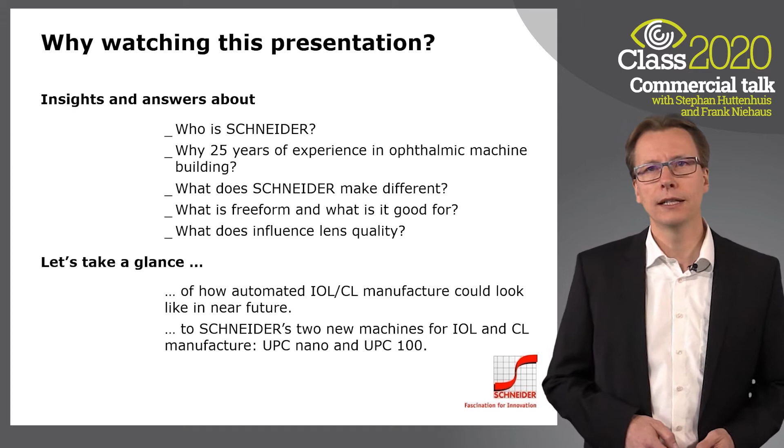The following presentation will give you insights about who's Schneider, why we have 25 years of experience with ophthalmic machine building, what makes Schneider different, what is freeform and what is it good for, as well as what influences lens quality. We will look at how automated IOL and contact lens manufacture could look in the near future, and take a look at Schneider's two brand new machines for IOL and contact lens manufacture, the UPC 100 and the UPC Nano.

This is the UPC Nano. It is a very compact machine with an extremely low investment price. It features an onboard fast tool system that allows for non-spheric machining, like toric or freeform, for a price less than most spherical machines. Plus, the machine is ready for automation. A more deep investigation of this machine is part of the following presentation.

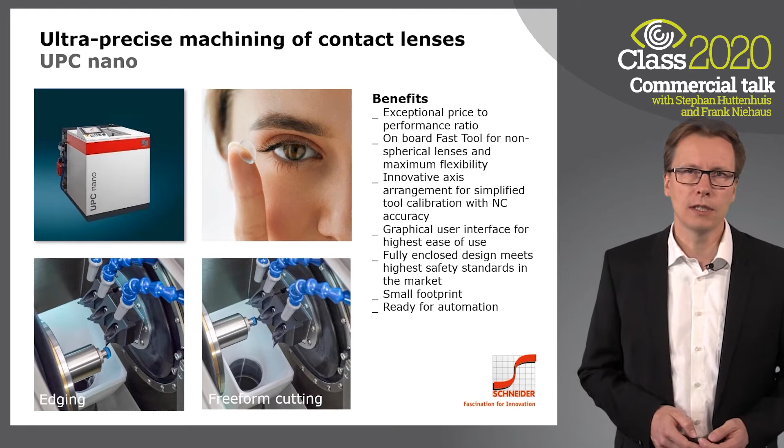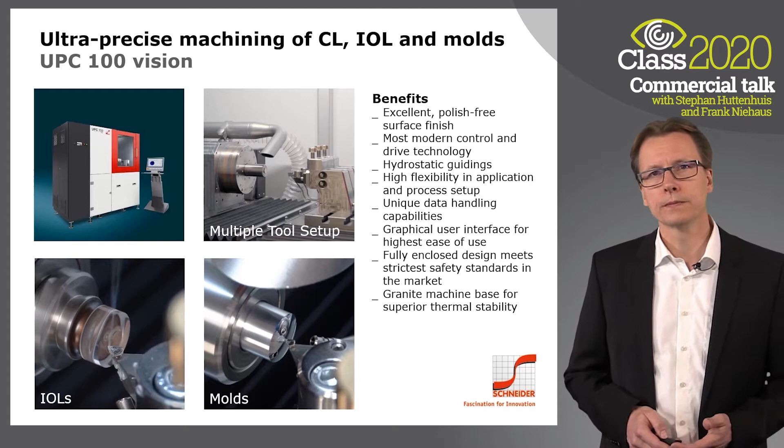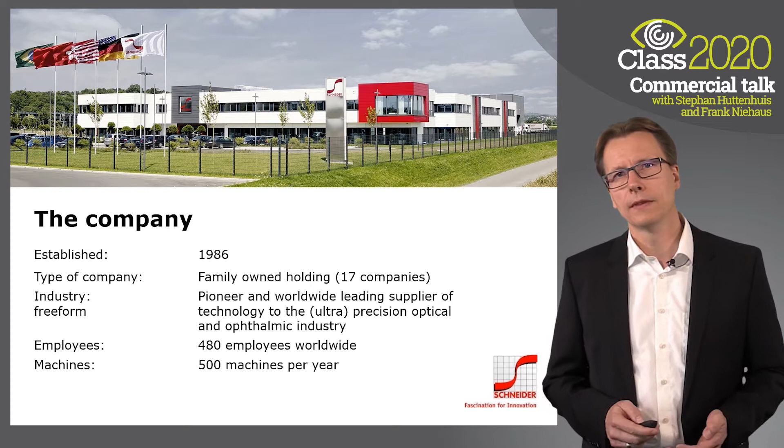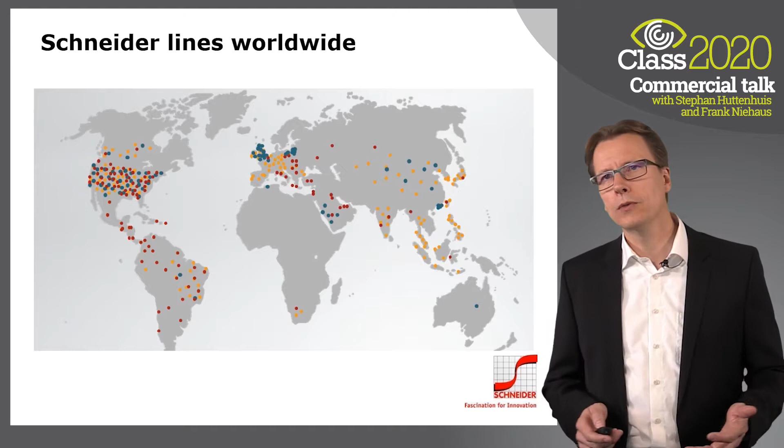So let's get started. We are a quite young company, founded in 1986, and became the pioneer and worldwide supplier of freeform technology. We have around 480 employees globally, and 10% of those are apprentices. We are building around 500 machines per year. We are a global company. Our customers are distributed throughout the whole world. Our export ratio is far more than 90%.

As a consequence, our service points are very international too, allowing us to provide local service in mother tongue in many cases. Our products can be found in ophthalmics, which is our biggest division, precision optics, where the company started, and in ultra-precision optics.

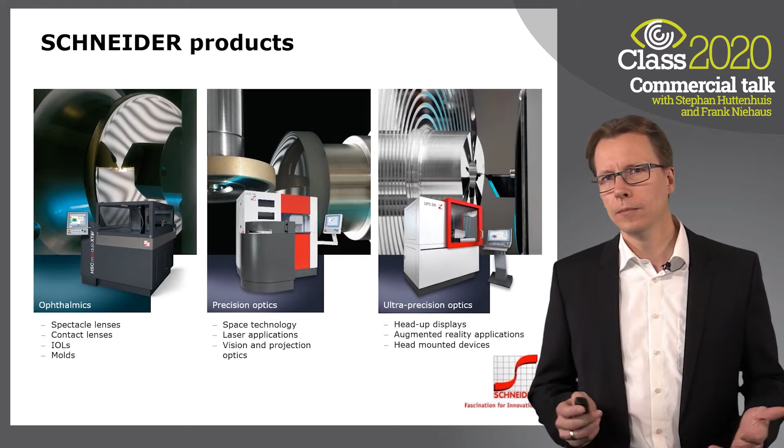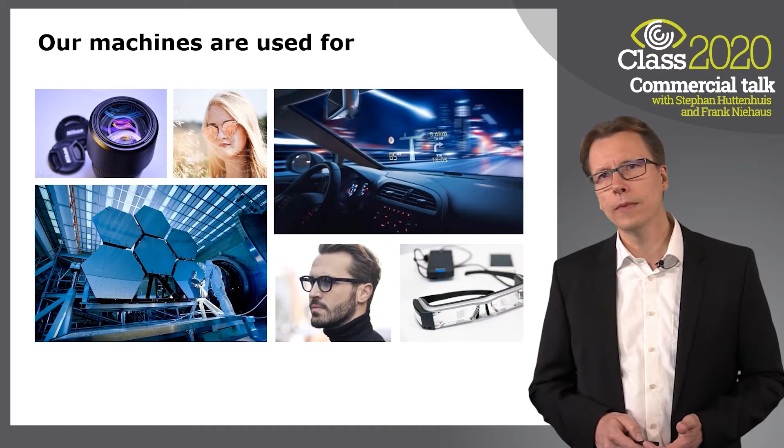Ultra-precision machines are considered to be the most accurate chip-removing machines possible. Higher accuracies cannot be gained mechanically anymore, but would require techniques like electron beam or lithography. Our machines are used for a vast variety of applications, like camera lenses and space telescopes, sun and prescription lenses for spectacles, or head-mounted devices in augmented and virtual reality applications.

Our company slogan is Fascination for Innovation. This means we are always keen on creating solutions that can do more. It became a passion to push limits which were considered to be unchangeable. This dedication allowed us to rewrite the story of lens manufacture and spectacle lenses. And we believe this can be done for contact lens and IOL too.

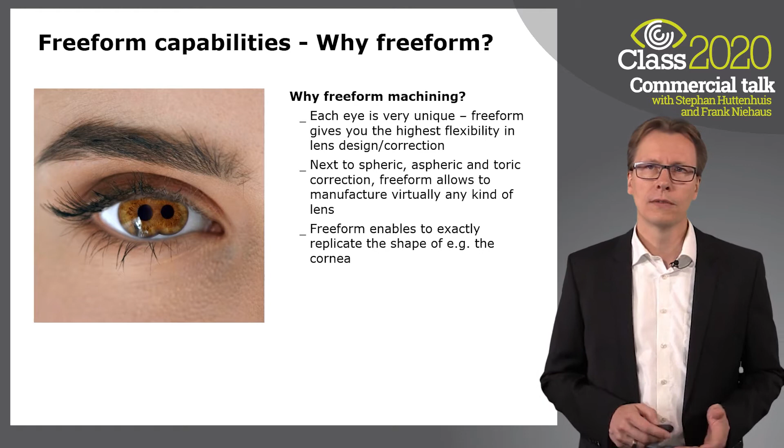So why freeform? Each eye is very unique. Freeform gives you the highest flexibility in lens design and correction. Freeform machinery can do spheric, aspheric and toric lenses, but is not limited to those geometries. Freeform allows you to exactly replicate the shape of the cornea, for instance as a starting point for designing best wearing comfort and tear film propagation, or to correct additional high-order aberrations like astigmatism, coma, trefoil, etc. But the more demanding the lens, the higher the demands on the machine and machine dynamics.

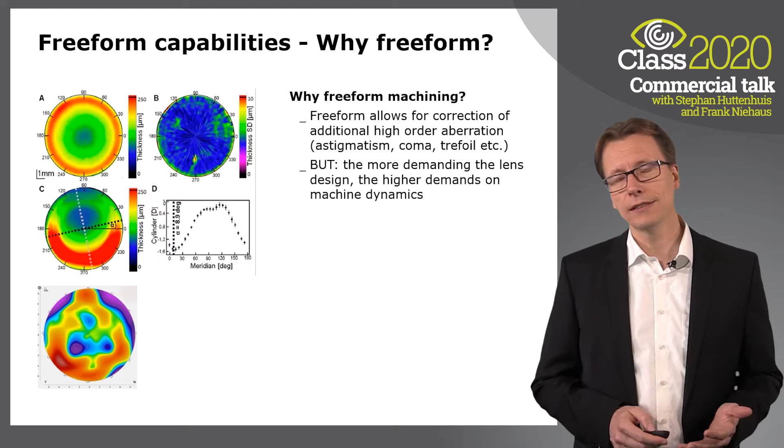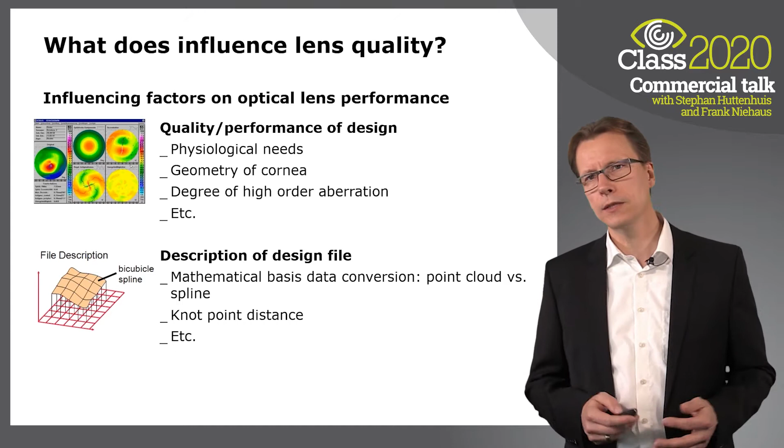A third route applies to the transition from design information to the according machine axis movement. What is the related acceleration and slope of the axis? How can I avoid a decrease of data quality within the multiple conversions from designer to controller, to NC code generator, to the drive, and finally to the axis itself?

And a fourth group is the process design itself. What parameters should be used, and what is the best compromise between throughput and quality? So there are a lot of influencing parameters that need to be taken into consideration to make sure you get the best possible lens quality.

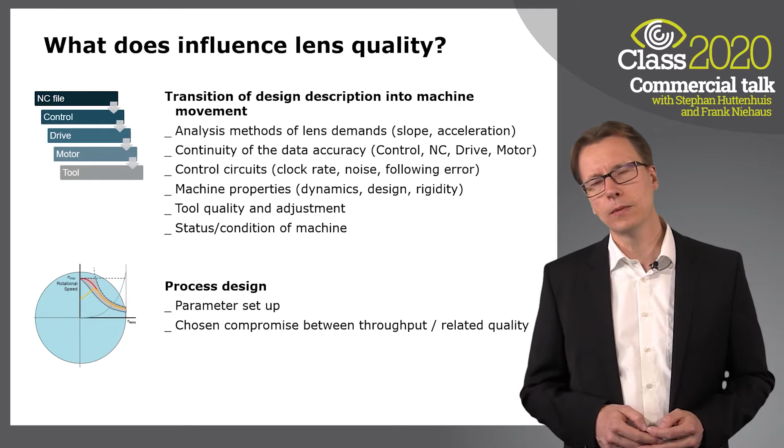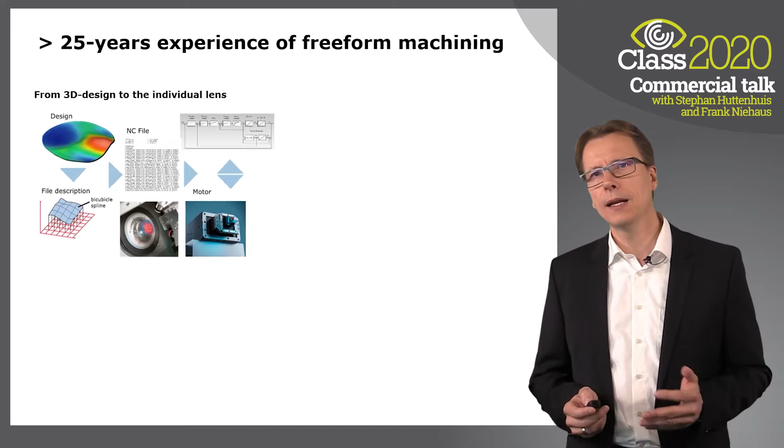Schneider has been paying attention to all of these aspects for more than 25 years. We developed our own software and mathematical architecture to extract all relevant data from the design file to create an automated NC code engine. And we designed according regulation loops, and even the dynamic motors are designed and produced by Schneider itself. We take care that our regulation loops are fast enough and our motors quick enough that even the most complex freeform designs are met with highest precision.

We take care that our drive systems have lowest noise levels to avoid unnecessary surface roughness on the lens. All this is done with one goal in mind: to create the best possible lens quality.

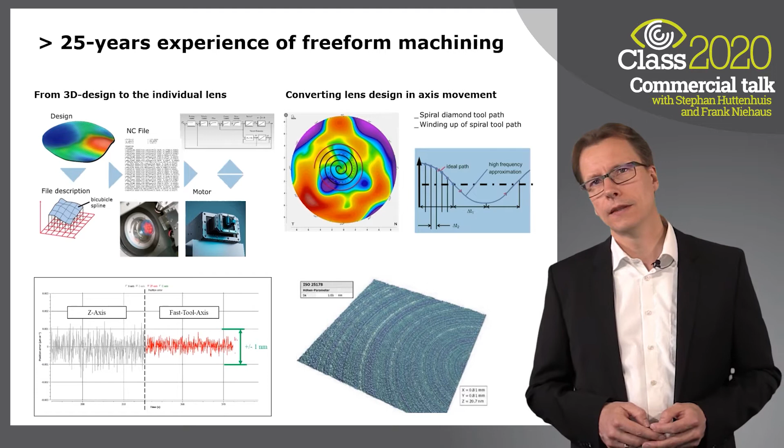Since the beginning of freeform, Schneider deals with mastering all quality influencing factors and made freeform machining the core competence of the company.

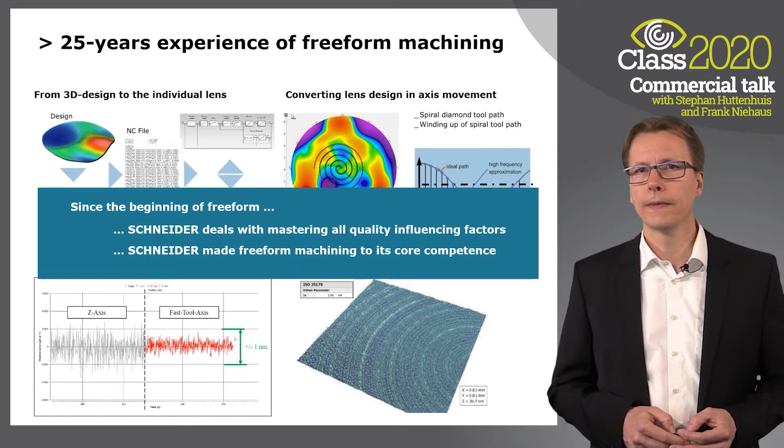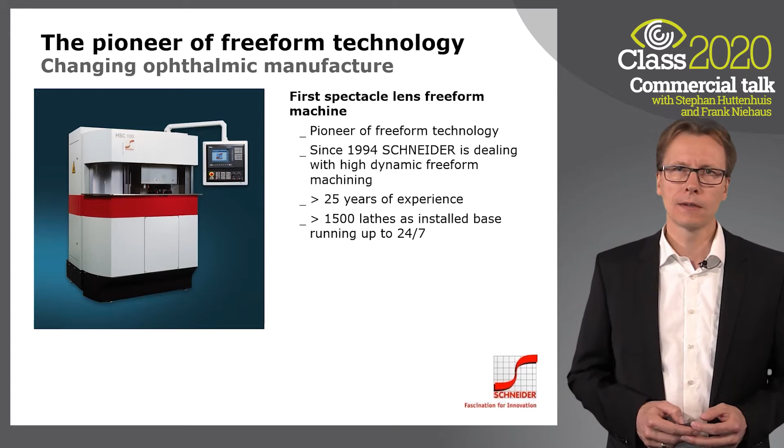Our journey as a pioneer of freeform machining started in 1994. Today we have an installed base of more than 1,500 lathes running 24/7 in most cases. Over time, we were able to offer dedicated solutions to all different aspects of the spectacle manufacturing chain.

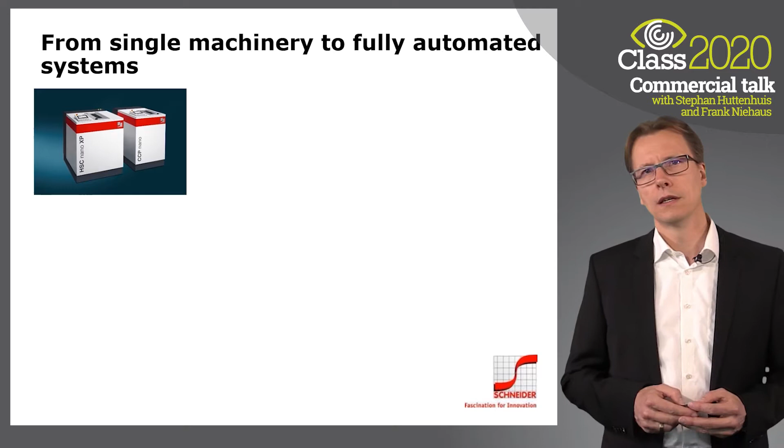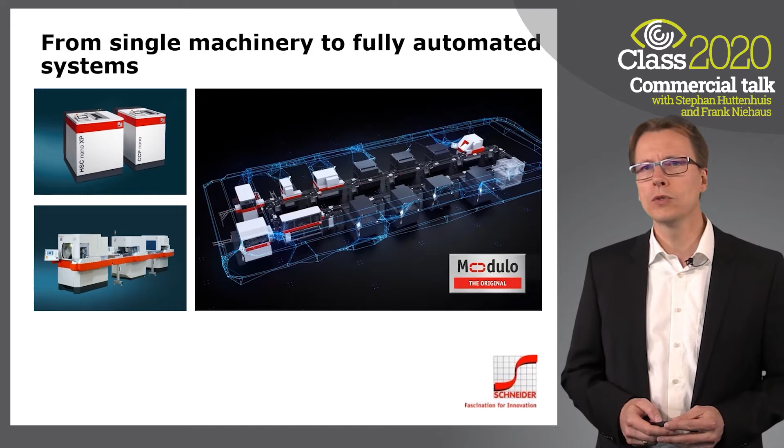Our path led us from single standalone production machines to machine lines to a fully automated self-balancing production system with integrated lens logistics. Today, we are a full solution provider in the ophthalmic business, including software.

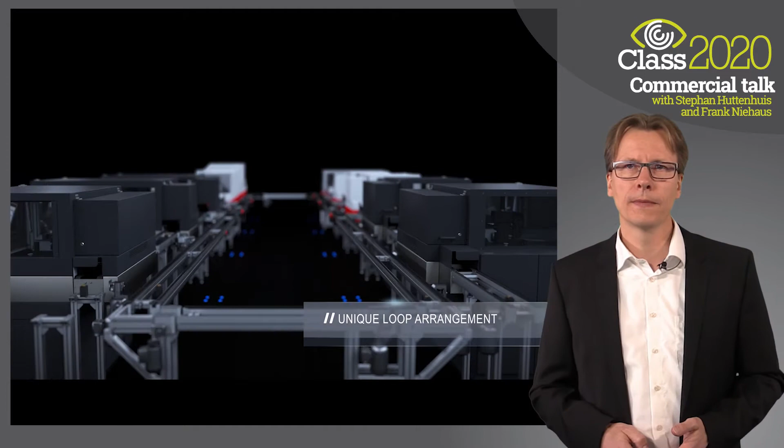What you can see in this video is the first industry-proven, fully automated spectacle lens production system. We call it Modulo. Modulo allows to integrate many different types of machinery into one lens logistics system.

Its basic philosophy is to organize the workflow completely by itself. The system understands which lens can be machined at which place and takes care that all machines are running as much as possible. This allows for the best throughput and the best utilization of your investment.

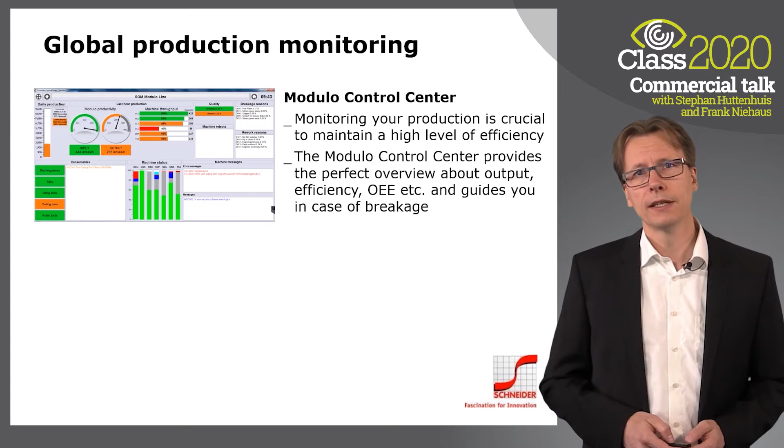Highly efficient production needs good monitoring abilities. The Modulo Control Center tells you for each machine the according production status. Does it run or not run? How much lenses were made? It shows the overall equipment efficiency and guides you in case of a breakage.

The following video shows you the whole production system is monitored and controlled by the Modulo Control Center. The virtual lab overview represents the layout of your lab and shows you critical information at a glance.

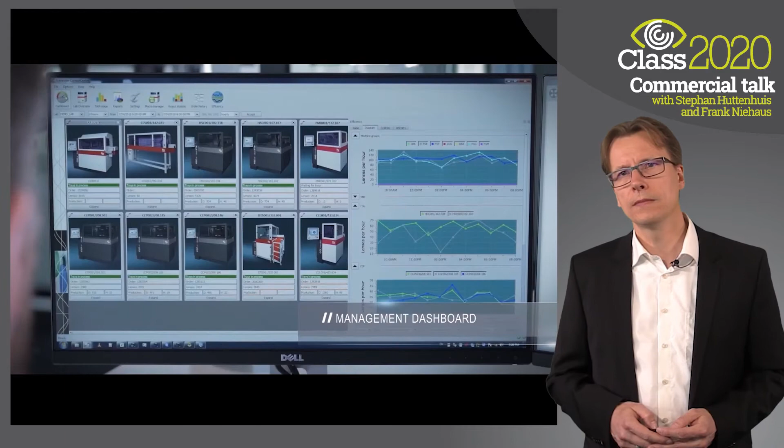Modulo allows for middle and high volume production, but still gives you all the flexibility that is needed to keep each lens unique and different. This system is used in spectacle lens manufacture since 2013. In the meantime, over 100 million lenses were already made using the system.

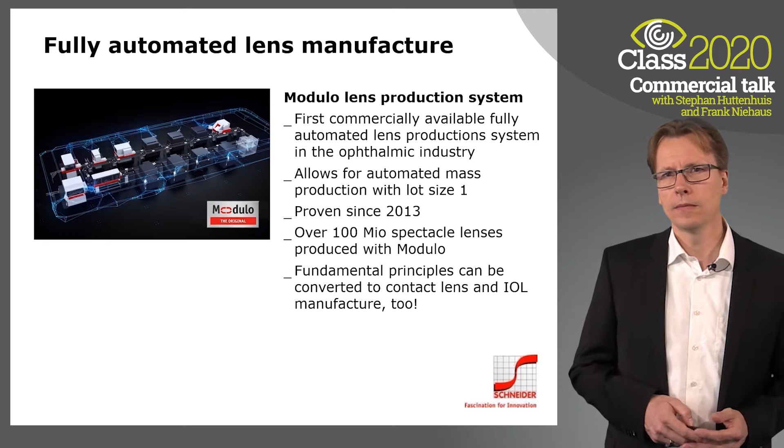We believe that fundamental principles can be converted to contact lens and IOL manufacture too. It may not look the same, but it will be able to do the same. Our journey from 1994 until today considerably changed the way of automated lens manufacture and forced us to continuously reinvent ourselves by driving innovation. It paved our way towards becoming a full solution provider.

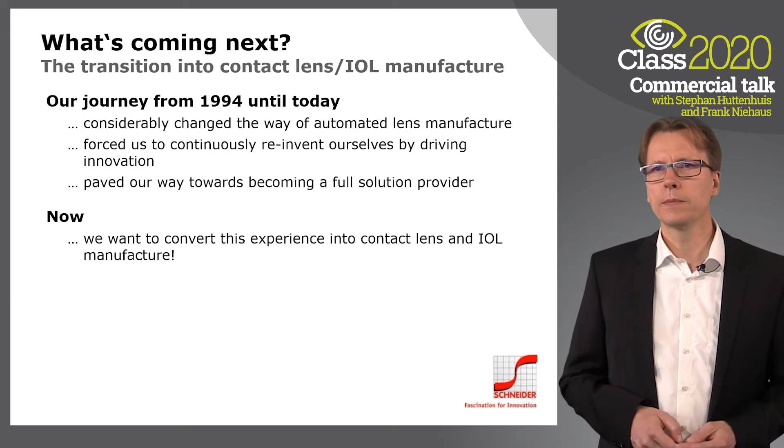And now, we want to convert this experience into contact lens and IOL manufacture. Our first step is the introduction of these two brand new machines, UPC Nano and UPC 100 Vision, that will be presented in more depth by my colleague.

The UPC Nano is a very compact machine for the contact lens and IOL market, and the focus is on a very good price to performance ratio.

Already in the basic configuration, the machine comes with an onboard fast tool that is able to carry up to 3 tools. This allows to machine a wide range of optics, spherics, torics, sclerals, and even freeform lenses.

Usability has always an important role. Hence, the innovative axis arrangement supports the operator for an easy and quick tool calibration without manual adjustments using only NC axis. The graphical user interface in combination with a touchscreen is also very convenient to use.

With the machine you can get an optional laser marking unit, and the machine is also ready for automation. For safety, the whole machine is fully enclosed, fulfilling highest safety standards in the market. All these features are integrated in this compact machine, having a footprint of only about 1 square meter.

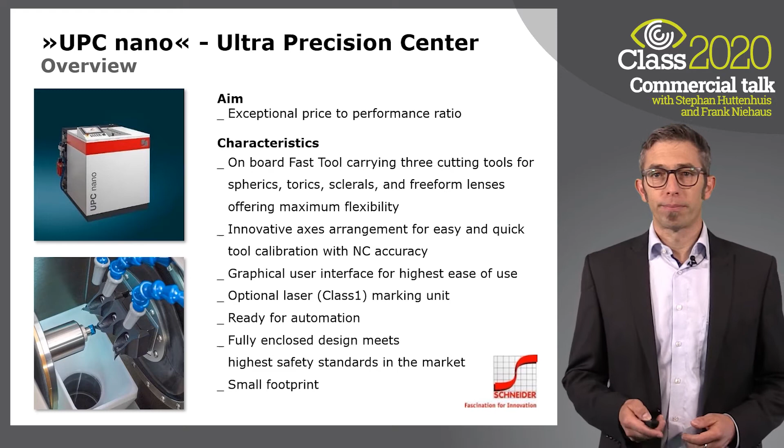The distance between the cutting tools allow for a maximum workpiece diameter of 25 mm. With this special tool setup, we really turn the whole process upside down.

The nozzles, which can be activated individually by the controller, blow from the top, and the chips and swarf is leaving the working chamber through the base of the machine by an exhaust system. The chamber is not only prepared for spray misting, but also flood cooling is possible, which can have a positive effect for certain processes.

The air-bearing spindle comes with an automatic collet for a diameter of 12.7 mm and has a maximum speed of 10,000 RPM. All in all, the compact machine base in combination with an air spring isolation unit allows for sub-micron accuracies in the lens manufacturing. Let's see how the machine is operating.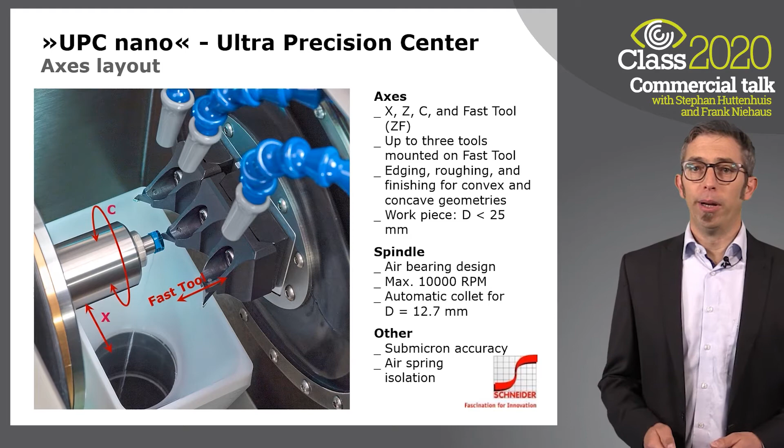Here we see a video about the machine process. It's about the cutting of the backside of a lens. It starts with the machining of the outside diameter.

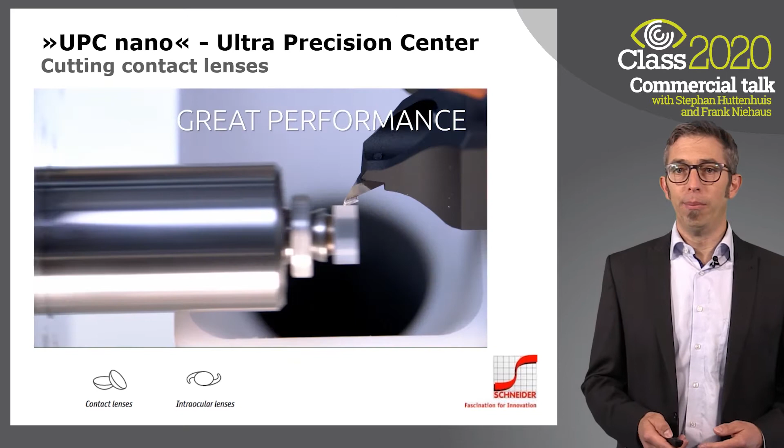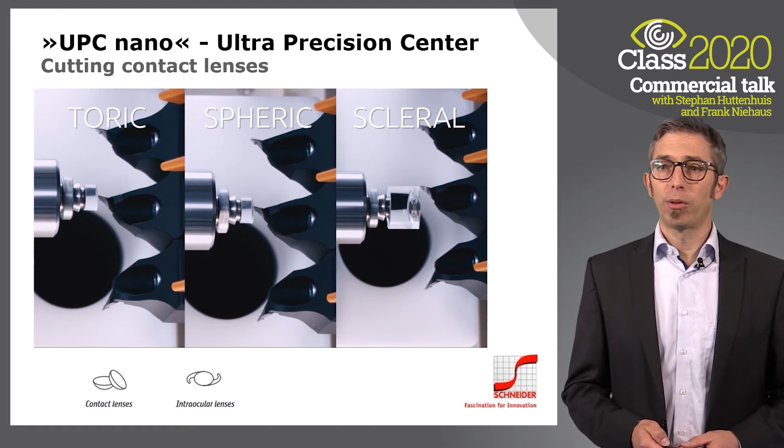After that, the lens is further processed by the roughing tool in the middle. As mentioned earlier, the geometry is not only limited to spherics, but already with the base configuration of the machine, torics and even freeform scleral lenses can be machined very efficiently. Finally, the finishing steps take place with the third tool.

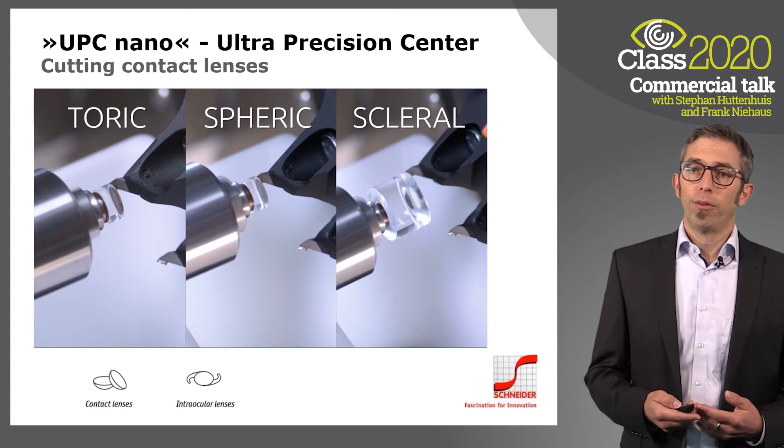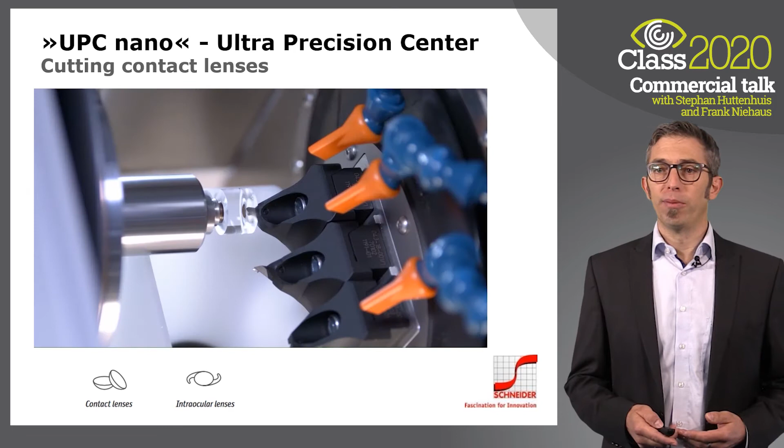The detailed view onto the scleral lens cutting shows very nicely the dynamic motion of the tool in the millimeter range. The motion control and toolpath calculation are based on algorithms that we developed for the freeform machining of spectacle lenses, ensuring high form accuracies, as Stephan described earlier.

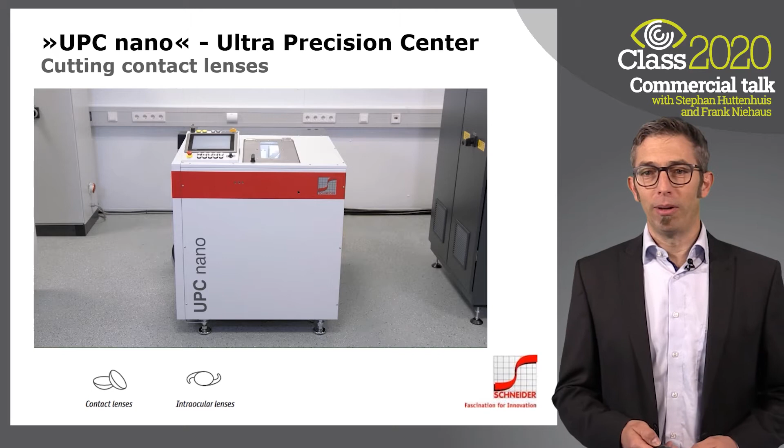Okay, lens finished. Let's have a look how the machine is operated. The machine controller is based on an industry PC with high availability and robustness. We use the same controller type in our ophthalmic machineries that are running all around the world, very often 24/7. The operating system on the PC is Windows 10 in the 64-bit version.

Also, the CNC is running in 64-bit mode, allowing for 10 picometers programming resolution. The modern Windows enables also the easy connection to your local area network. The interface for the operator is a modern touch display.

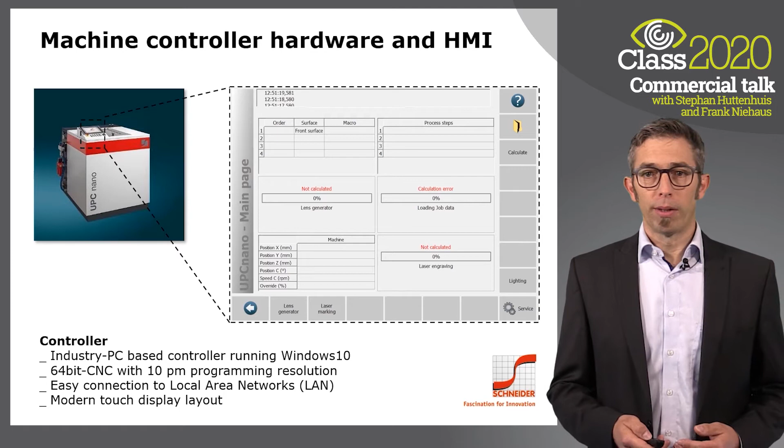The picture shows the main screen that allows for loading lens data files and the calculation of the toolpath. Then the cutting process can be started by hardware buttons.

Different data formats can be loaded to and processed by the HMI on the machine. We can work with meridians or point clouds. There's also an interface for the focal point software package. Since we do all the software developments in-house, we are also open to integrate other formats and interfaces. Just let us know what you need.

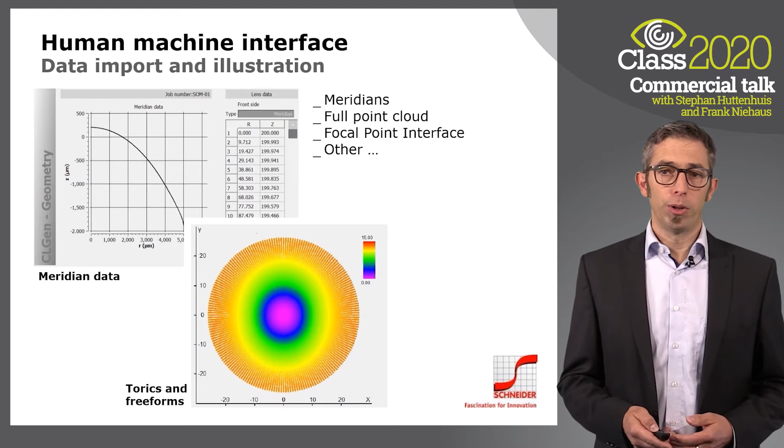Earlier I was already referring to the tool calibration routine. What is meant by that? Due to the innovative axis arrangement, we are able to correct the tool height by refining the fast tool position. By that, the operator just has to type in the determined tool offset in height, and with the position of the NC axis, the machine does the adjustment by itself.

Besides the ease of use, this allows for a very rigid connection between the cutting tools and the dynamic moving fast tool slide, excluding any tiny adjustment flexures or mechanisms. And in the end, this increases surface finish of the cut lens.

Of course, you'll find all required tool information in the tool database as part of the HMI. There you can also correct the tool position in the other directions like X and Z.

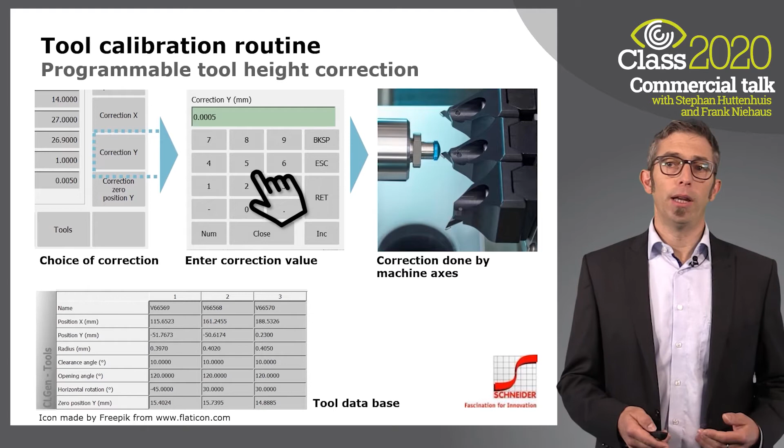Optionally, you can get with the machine a fully integrated laser unit, directly placed next to the cutting tools in the working chamber. This allows for safety class 1 operation without any further measures for protection. You can use this for different engraving tasks like ID codes, alignment marks or logos. The constant engraving quality is ensured by laser beam stabilization, overcoming well-known issues with CO2 laser units.

But the real specialty of this laser is that it's using a scanning mirror, as you can see in the sketch beside the picture. By the moving mirror, the laser focus is moving over the lens surface. This avoids time-consuming repositioning of the lens with the machine axis for every dot in the marking. Hence, even larger ID codes or special engravings are done within seconds.

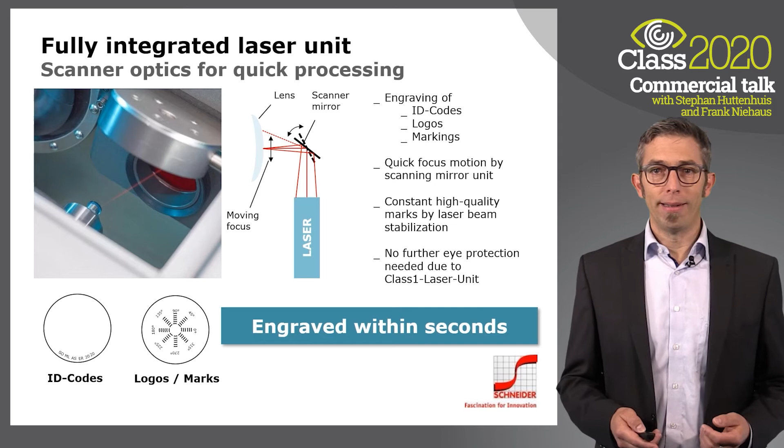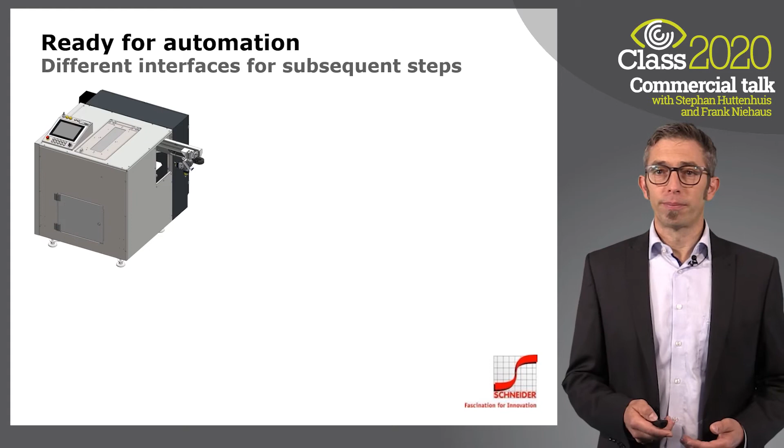The UPC Nano is prepared for automation and can cooperate with different principles. Therefore, a handling system is integrated into the machine for moving the lenses in and out, handing them over to the spindle. Outside the machine, there are various possibilities. A robot can be used to hand over the lenses to other machines for following process steps, or to combine the machine with an existing storage.

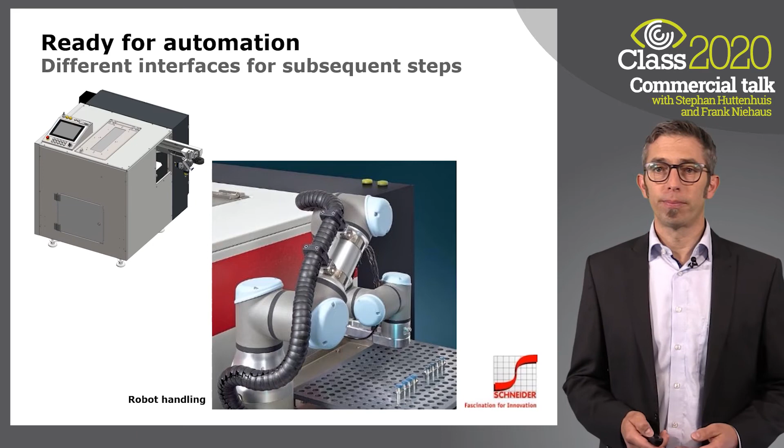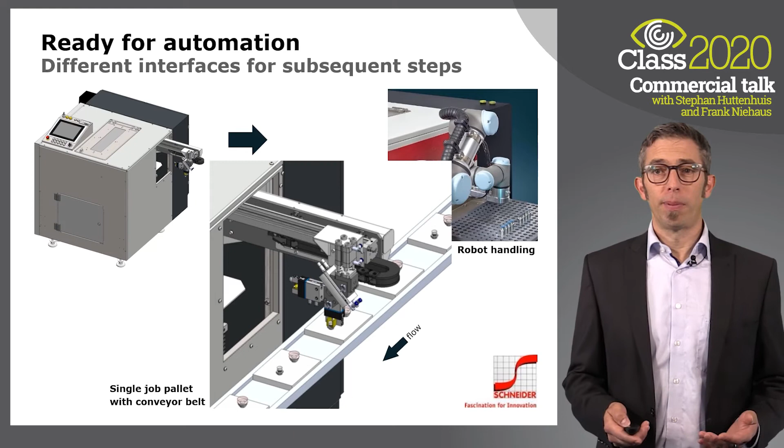Of course, the handling system can also cooperate with multiple job pallets, as can be seen in this illustration. If you want to set up a large system comparable with our modular system that we introduced in the ophthalmic market, or if you prefer a kind of one-piece flow, you can combine the machine by the handling system with a conveyor belt moving single job pallets through the production. By that, different solutions are possible to be most flexible for your needs.

Of course, adapted solutions can be discussed if you have specific needs regarding capacity or specific block piece geometries. Just talk to us. All in all, it is an investment in the future, enabling an increase in productivity of your lens manufacturing.

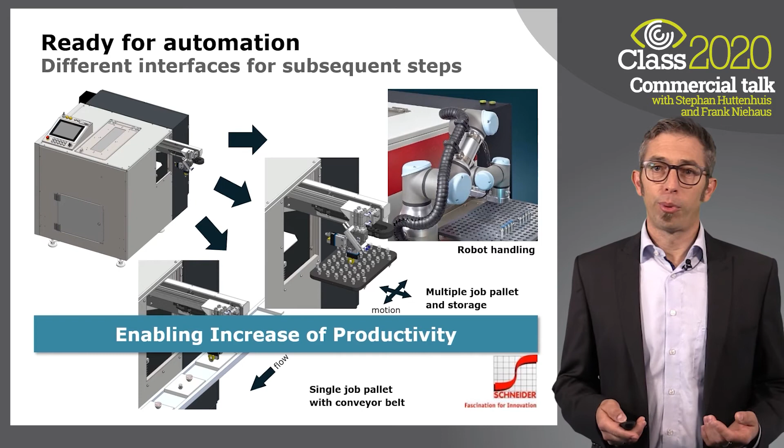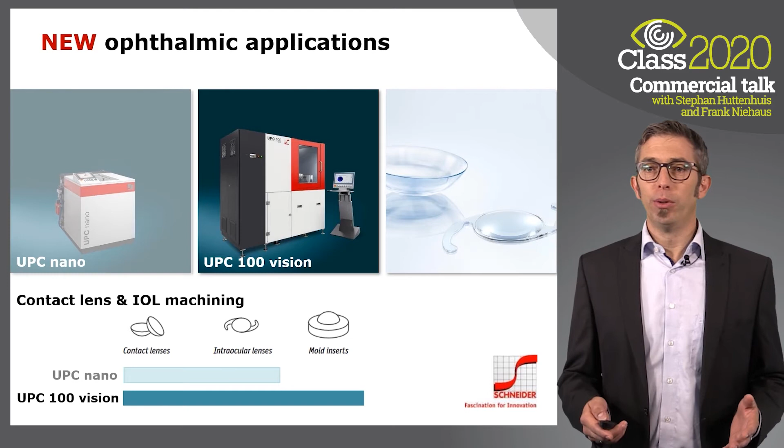So far, the introduction of the UPC Nano. Let's have now a closer look at the UPC 100 Vision. As you can see in the graphic below the pictures, the UPC 100 Vision is designed for a wider range of applications. Besides lenses, it can also be used to machine molds for the mass production of lenses.

This is possible since the UPC 100 Vision has been developed to achieve excellent polish-free surface finish combined with very high form accuracies. For this reason, we chose the most modern control and drive technologies, hydrostatic guidings for perfect damping and stiffness, and a granite machine base for thermal stability. Hence, the design follows principles of ultra-precision diamond turning technologies.

Although its high capabilities, the footprint of the machine is still small. The electrical cabinet, the hydrostatic pump, as well as the chiller are all integrated within the housing. As the lower picture shows, the machine offers high flexibility.

Due to a lot of space on the machine slides, you can arrange the tooling setups for your specific needs. The controller and the user-friendly graphical user interface come with unique data handling capabilities, in combination with the touchscreen panel. The machine has further a full enclosure to meet strict safety standards in the market.

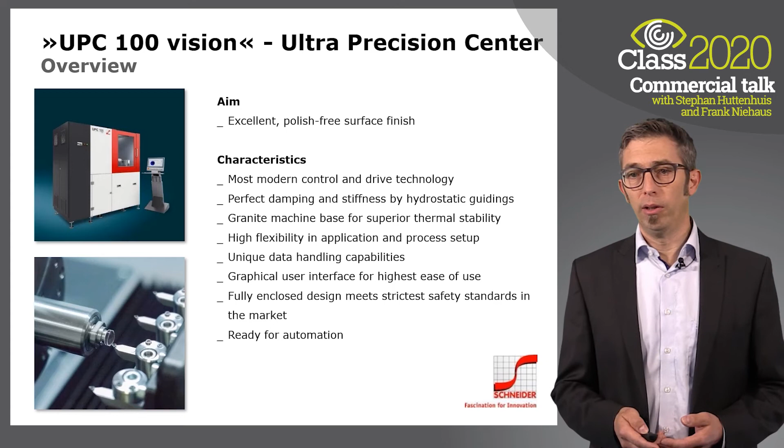Nevertheless, the housing as well as the controller are flexible for later integration of an automation system, similar to the solutions that I introduced for the UPC Nano earlier. Let's have a closer look at the working chamber. This picture shows the axis layout of the machine, which comes in the basic setup in a 3-axis configuration.

The fast tool for torics and freeforms is optional and will be mounted next to the tool holder on the X slide. The travel range of the X-axis is 250 mm and a T-slot plate allows for flexible tool arrangements. The Z-axis offers 100 mm travel and carries the air-bearing spindle, with an automatic clamping collet for the arbors.

This is a must for automation. In addition, each tool holder has its own programmable nozzle for air or spray misting during the cutting process. An exhaust system is available as well. Especially for IOL manufacturing, the machine can be adapted with a cryo-freezing unit. Here, the enclosure enables noise reduction and reduces contamination of the lab by chips and swarf.

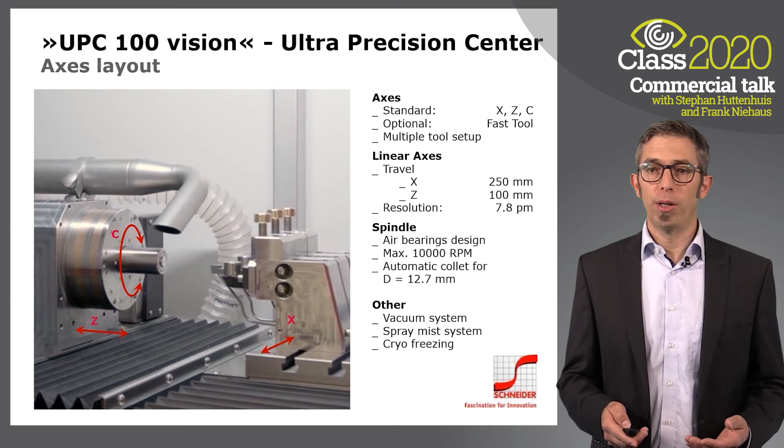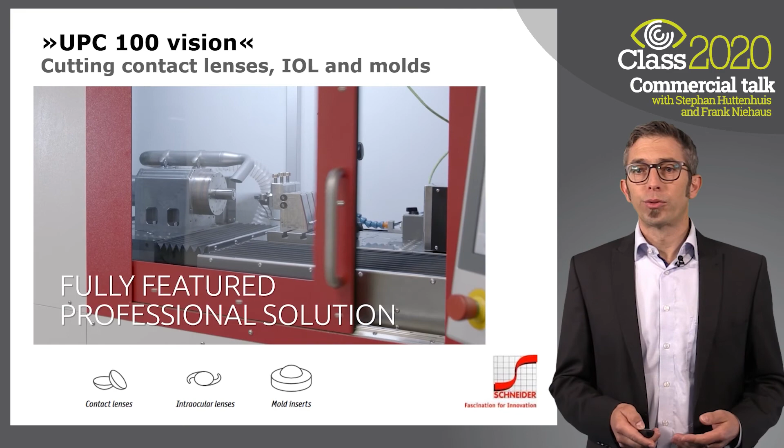Okay, let's have a look how the machine is running. Here you see both machines in our development lab in the factory. Through the sliding door, the operator has access to the working chamber. Again, the cutting process starts with a reduction of the lens diameter after blocking.

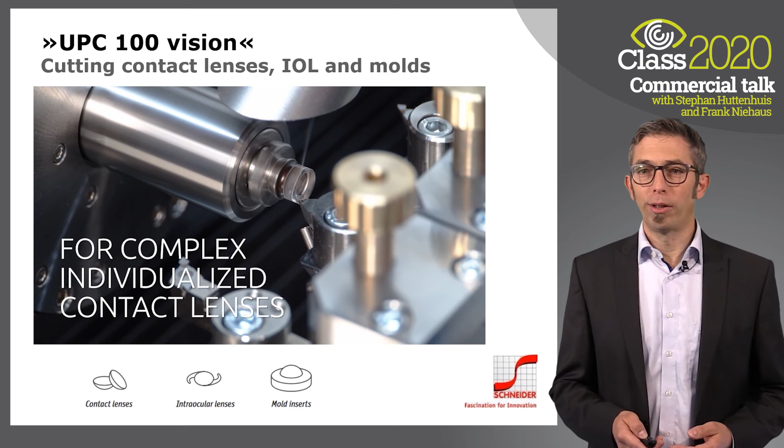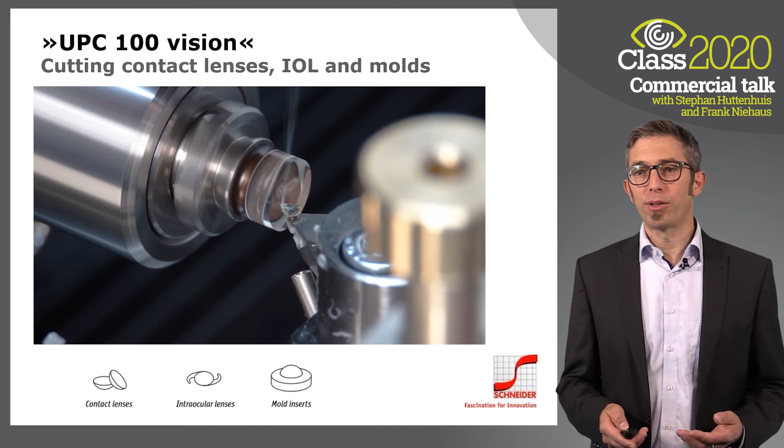Here we see the cutting of a contact lens design, followed by the cutting of an IOL geometry. Due to the high surface quality and stiffness of the machine, you can also machine molds for the replication of lenses. Aluminum or nickel coatings are typical materials for such molds.

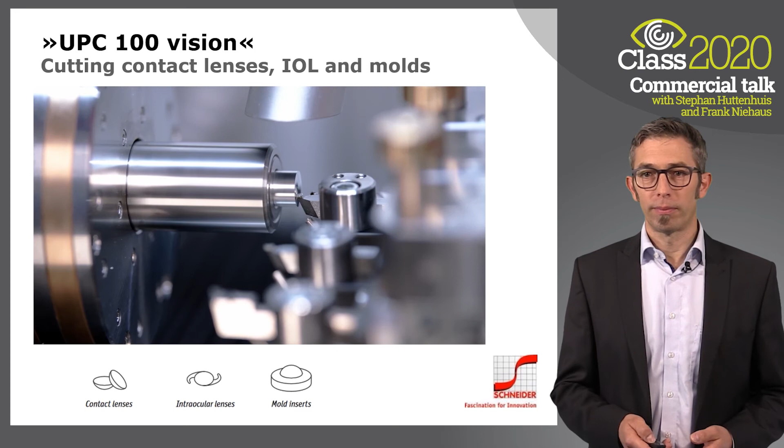The next slide will explain one important piece for achieving this high surface finish. The drive technology has a significant influence. We choose for the UPC 100 vision digital drives with clock rates in the range of 100 kHz, linear motors and high-resolution scales. In combination with the mechanics of the slides and the hydrostatic guidings, we achieve smallest following errors.

The graph shows the noise of the x-axis, which is below 1 nanometer PV. By that, nickel coatings for molds can be machined with roughnesses below 1 nanometer RA, as shown in the white light interferometer measurement.

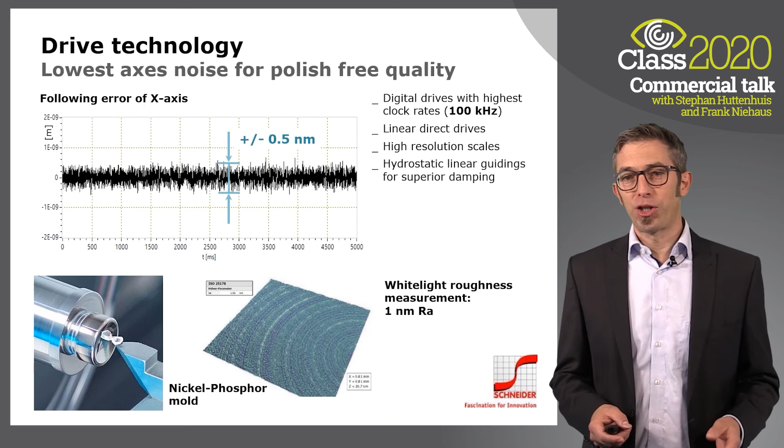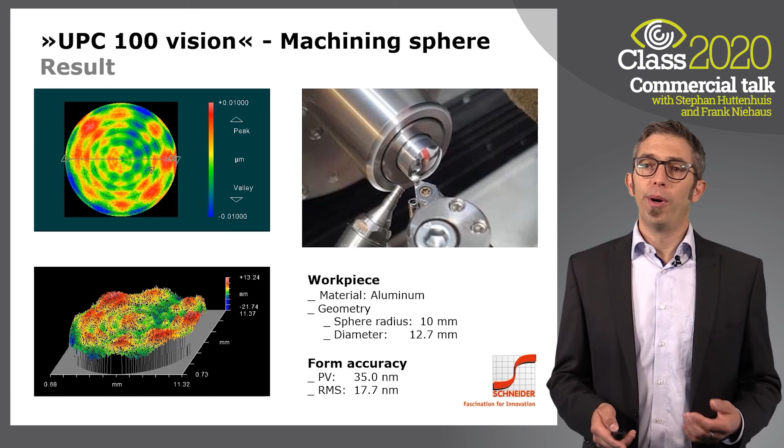But also the form accuracy is important, especially for molds, since you copy the shape during the replication process into thousands of lenses. This slide shows the interferometer measurements of a sphere cut in aluminum, achieving form accuracies way below 100 nanometer PV. Let's have a look at the controller of the machine.

The machine controller bases on an industry PC with high availability and robustness, very similar to the earlier introduced UPC Nano. The Windows version 10 as well as the CNC is running with 64-bit for high calculation accuracy. This allows us highest programming resolutions of 10 nanometers for very precise setpoint data. The modern Windows enables also an easy connection to the local area networks.

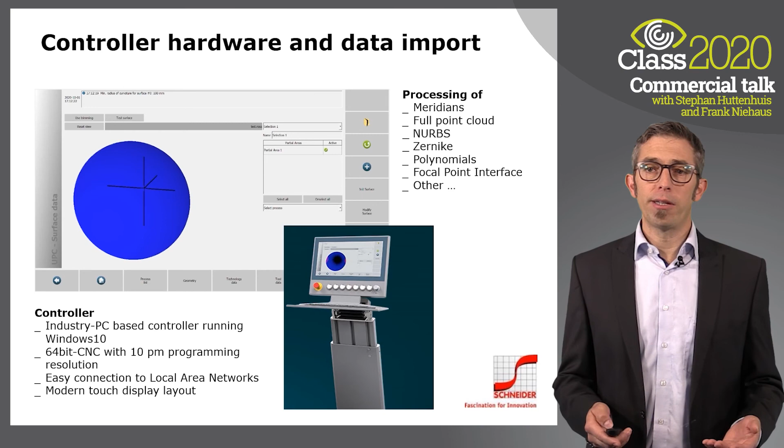The interface for the operator is a modern touch display combined with hardware buttons for the main functions of the machine and a keyboard. The HMI software developed in-house is able to process different data formats. Besides meridians, point clouds, and of course the Focal Point Interface, interfaces for NURBS, Zernike, or other polynomials are ready.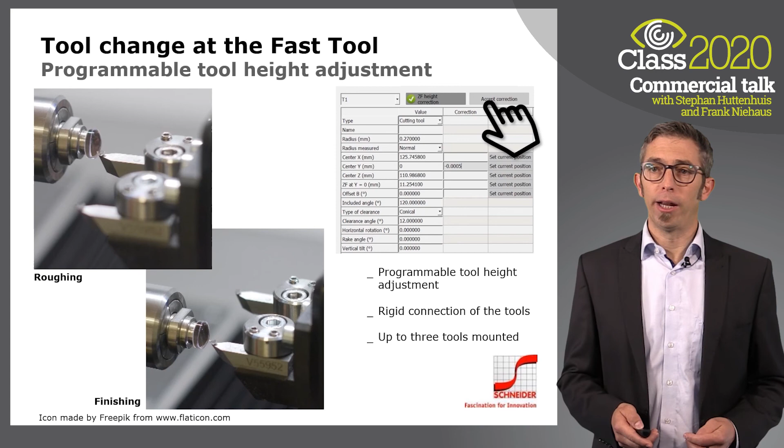Similar to the UPC Nano, we can also use up to 3 tools with the fast tool, for changing between roughing and finishing, or for keeping more tools ready for overnight manufacturing. Again, the tools are mounted rigid to the fast tool slide, and height adjustment is done via the tool database and a programmable fine adjustment of the fast tool axis position. This is very convenient, quick and precise, and avoids any weak and not stable flexures or other tiny mechanisms.

Last but not least, I would like to come back to the outside shell of the machine and the integrated safety aspects. The full enclosure protects the operator, reduces noise and contamination of the surroundings in the lab, but it is also required to fulfill the regulations regarding safety for machine tools. This is not only achieved by the housing, but by a number of different measures like safety glass, door interlocks, functional safe emergency stop buttons, process camera, and so on.

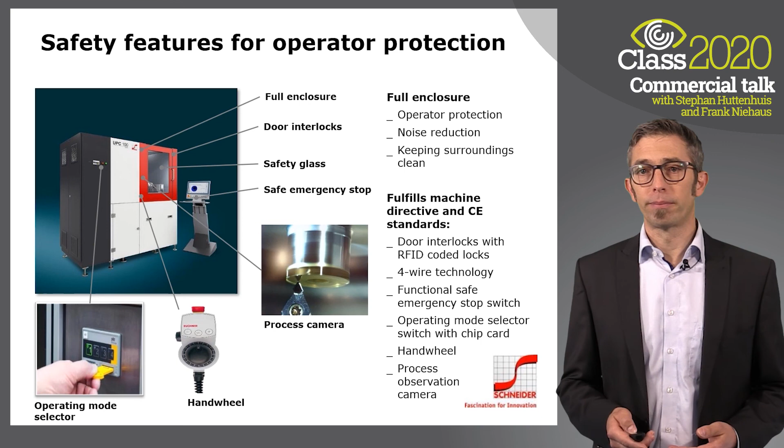Hence, many things that ensure a safe operation of the machine and of course protecting you and your staff in the laboratory. This is already the final slide of our presentation.